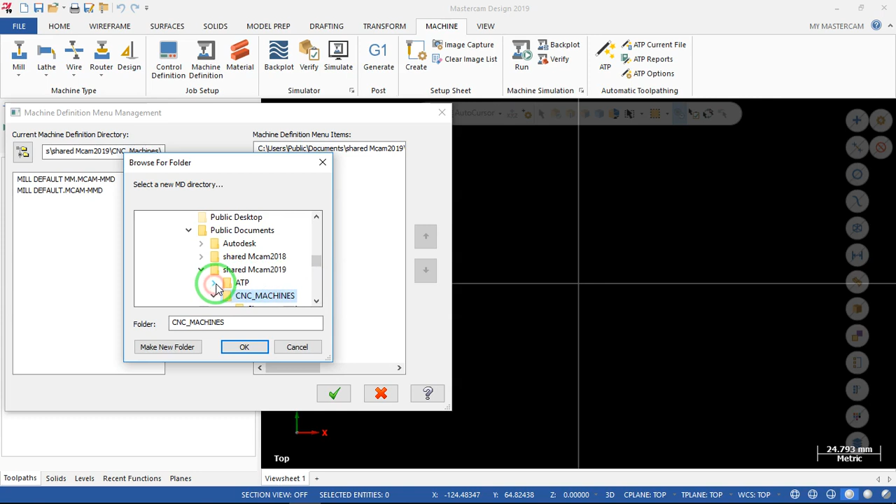When you are done, retake. For my case, I don't have to do this. Anyway, I have the machine with me - this is the Mazak machine, vertical milling machine.

So now the next thing is I want to merge the file. File, Merge, and I will navigate to my folder and all files. You can download this file from Blackboard. This is an STP file, so open it.

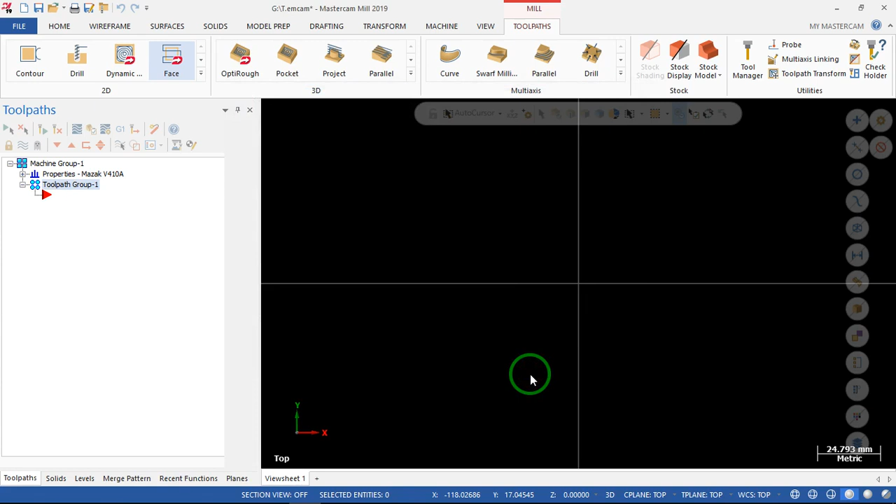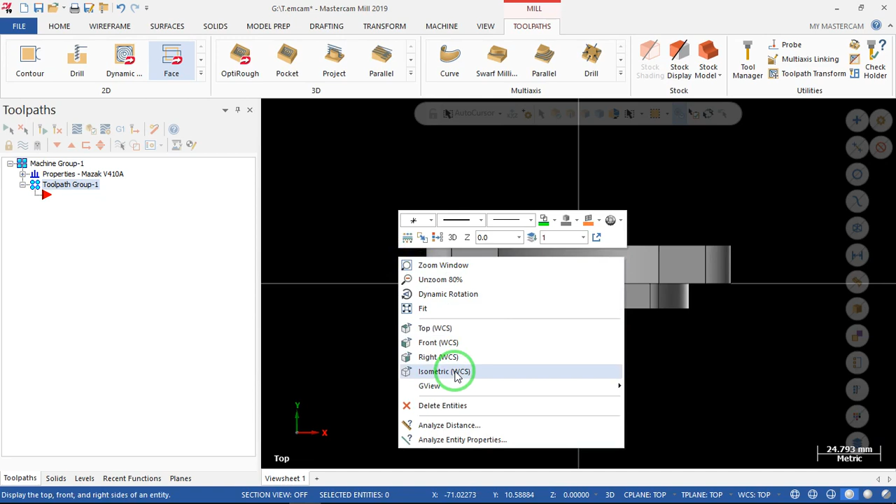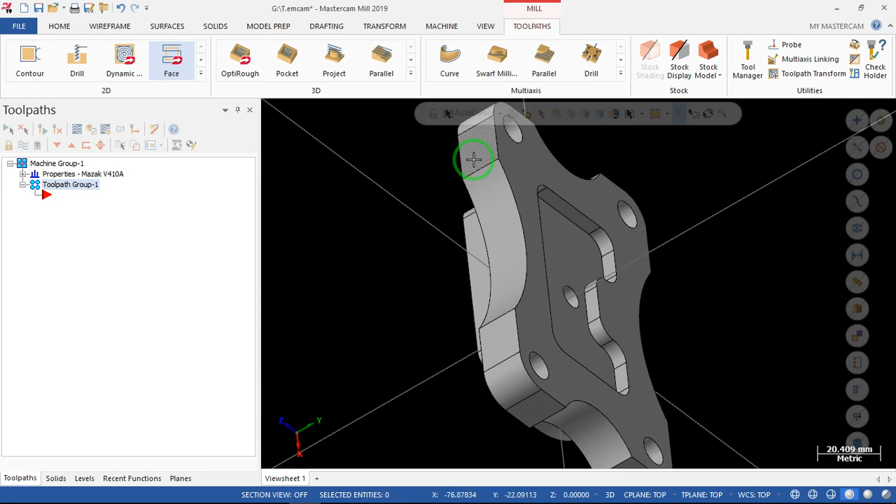Okay, so this is the workpiece. The question first asks: what is the proper orientation for this part to be machined? If you look at it from this isometric view, this side is like this, then the other side is like this. The point here is that you see this big curve. Although these are flat surfaces, at the center this is the curvature part, making it difficult for us to clamp on this surface here.

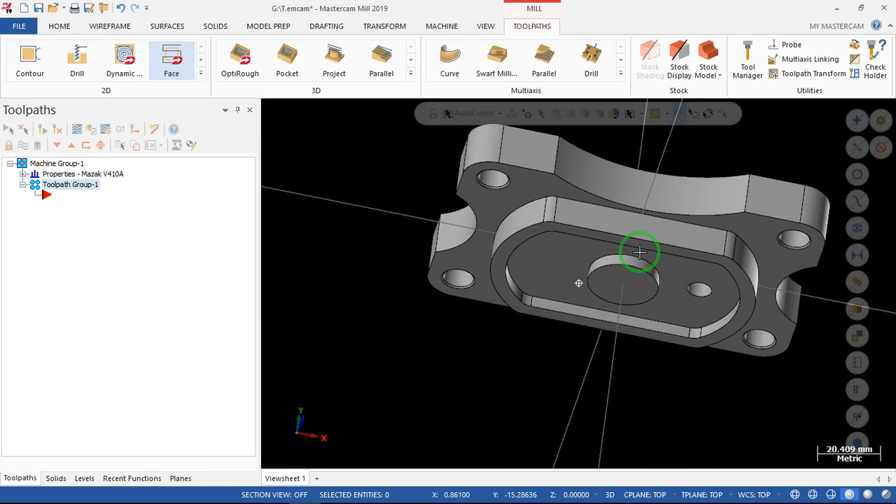So possibly a better choice is to machine from this end - at least we got some flat surfaces. These two flat walls can be mounted on the vise, on the fixed jaw and the sliding jaw. This will be a better approach compared to the other orientation. So in this case, we will have to rearrange the workpiece so that it is at the correct orientation. Now back to the top, this is what we originally worked out.

In order to get to this shape, I would like to go to my right view - my right is like that. Now I want to rotate the workpiece. Remember, rotation is always perpendicular to the screen. So this is the workpiece, I want to rotate it so that this is facing up.

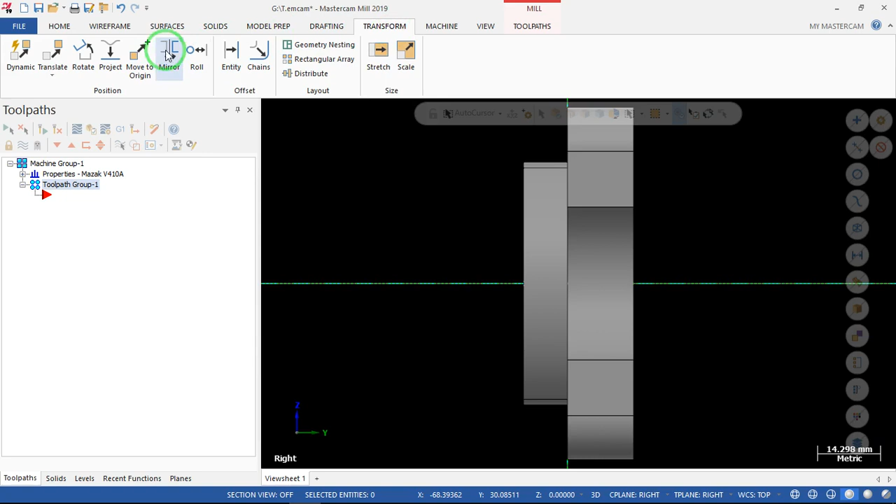We are going to machine this end. So I go to Transform, Rotate, select the workpiece and selection. Remember, we always want to move, not copy. And I want to rotate it 90 degrees. So when you enter, you see that now this case is not right - it should be minus 90 degrees.

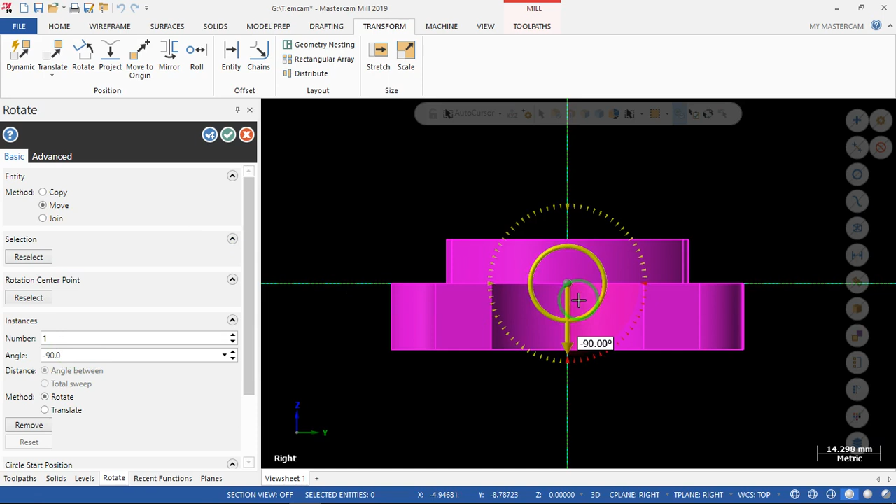Okay, this is correct. What happened is now I'm having this facing up. So I want to machine this part here first. So retake - even in this case, you can go to Front view. So this is the front view.

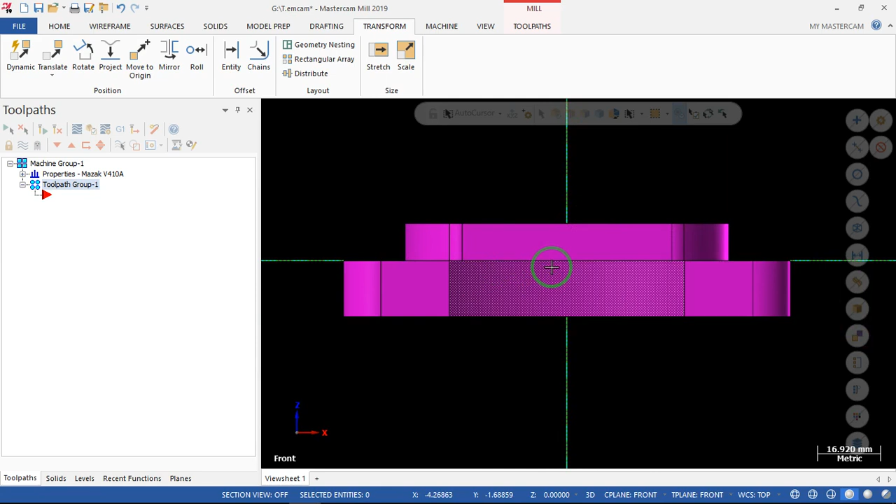Our G54 should be on top, not along this line. So I still need to translate the workpiece. Again, I will bring this - copy workpiece down by minus 10 mm.

You can take a look at your drawing. The drawing here shows that we will go down by 10 mm. So I call out the drawing - this is the part, 25 minus 15, so I need to bring this down by 10 mm.

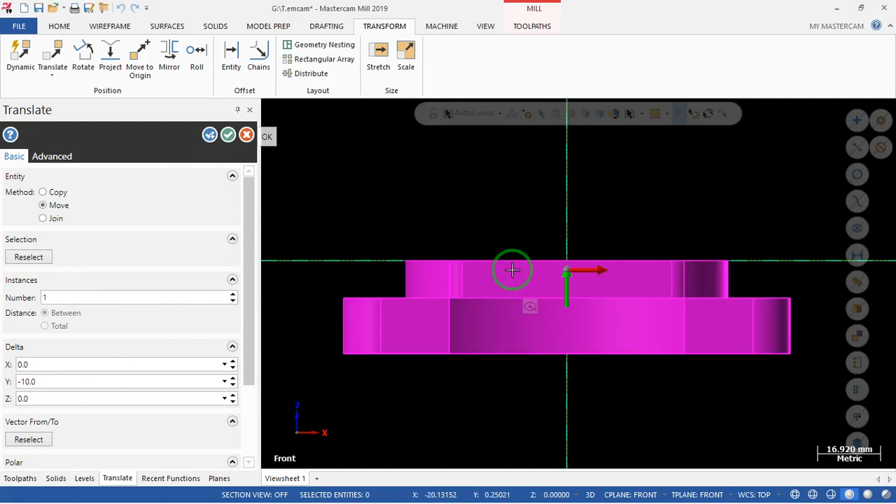Okay, let's go back to Mastercam. So I will bring it down - now my G54 is on top of the raw piece. With that in mind, now I go to the top view - this is my top, I'm going to mill this first.

After I finish milling all this, these are the flat surfaces. When I do the second side machining, this will go into the vise and support the rest of the workpiece. So isometric view is like that, front view is like that, top view is like that. Okay, let's continue.

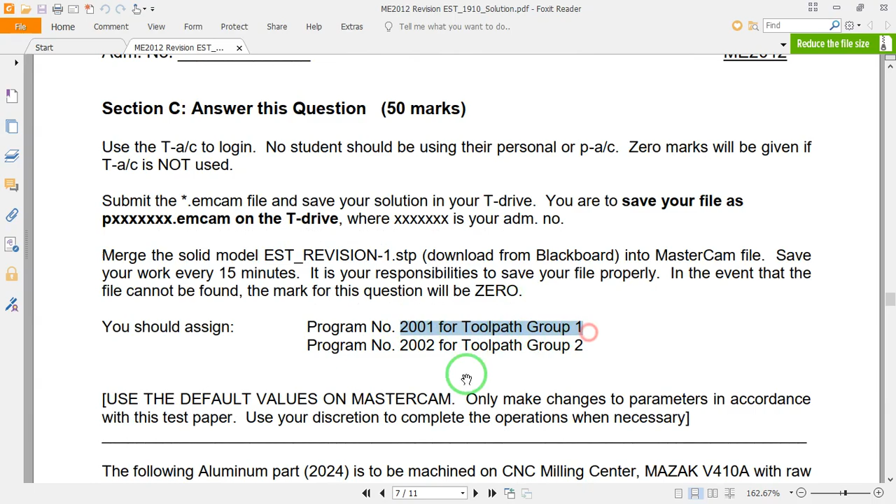Okay, go to tool settings, program number. We will have to look at the question paper. So we are asked to use this number 2001. For side 1, 2001; side 2 is 2002.

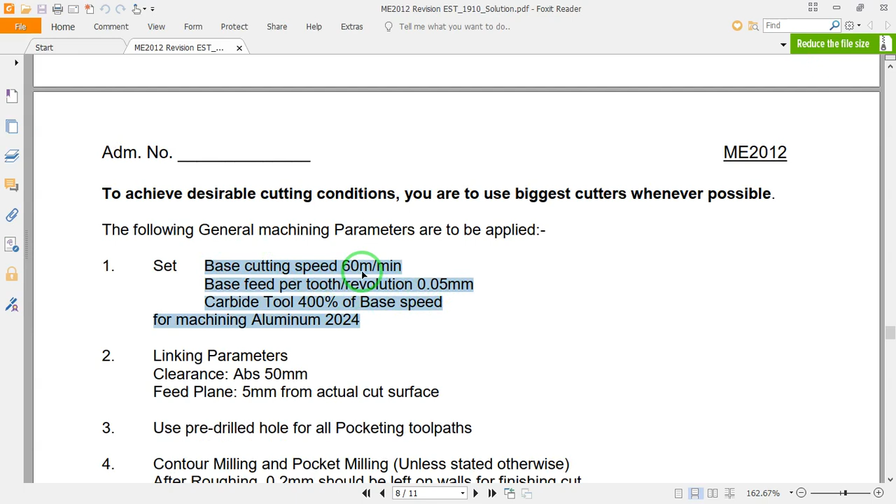Use tool's step, peck and coolant, and we have to change this value here. Edit. So what value do we want to change to? Again, we go to the question paper. It tells us these values here. So we'll enter these values: 60, 0.05, and 400% for the carbide tool.

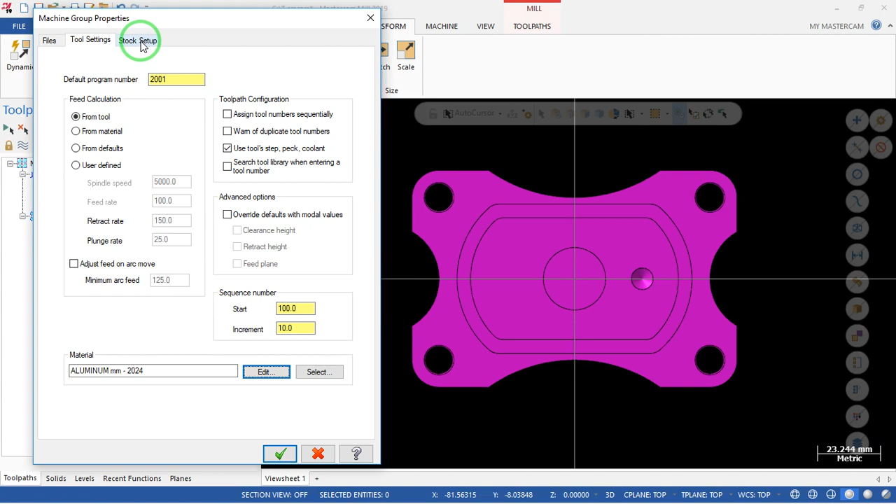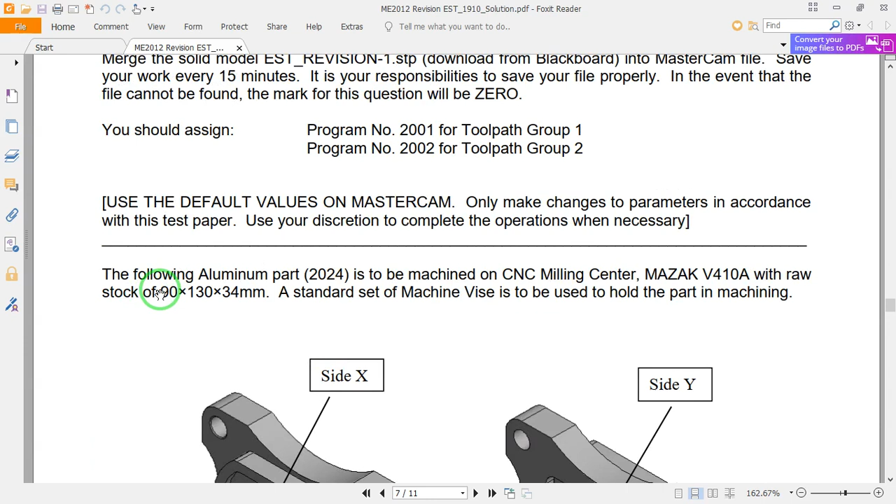With that, green tick. And so now we are done with this. Then stock setup, so we have to input the raw materials here. I will go to the paper. The raw material itself is 90 mm,

130 mm on the x-axis, 90 mm on the y-axis, 34 mm on the z-axis. So I will have 130 here, 90 here, 34 here. So these values are the raw material size, the size of the raw material.

And also, if you look at this, it tells you that the first operation is a facing operation. The facing amount is 0.5. So in order to machine it up to G54, I will have to bring this up by 0.5. So this raw material will be above the work piece by 0.5 mm. Then when we want to machine, I will just remove this 0.5 mm to get to G54. Okay, so with that, we are done. Green tick.

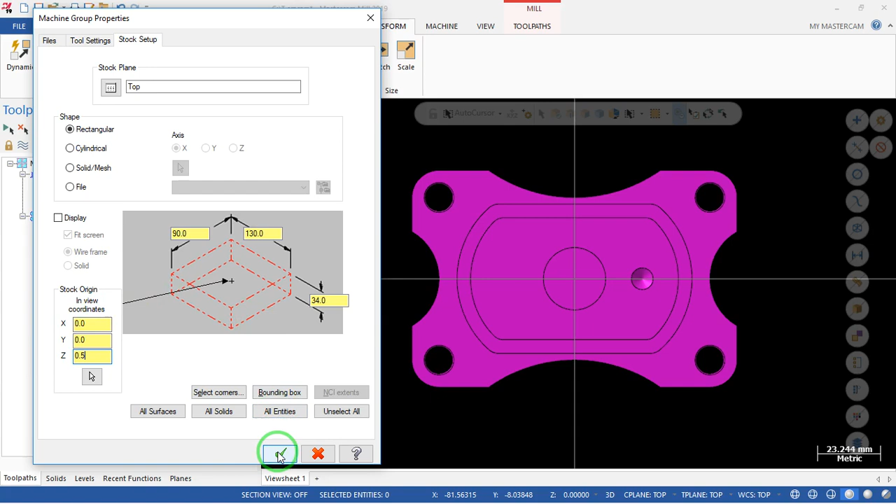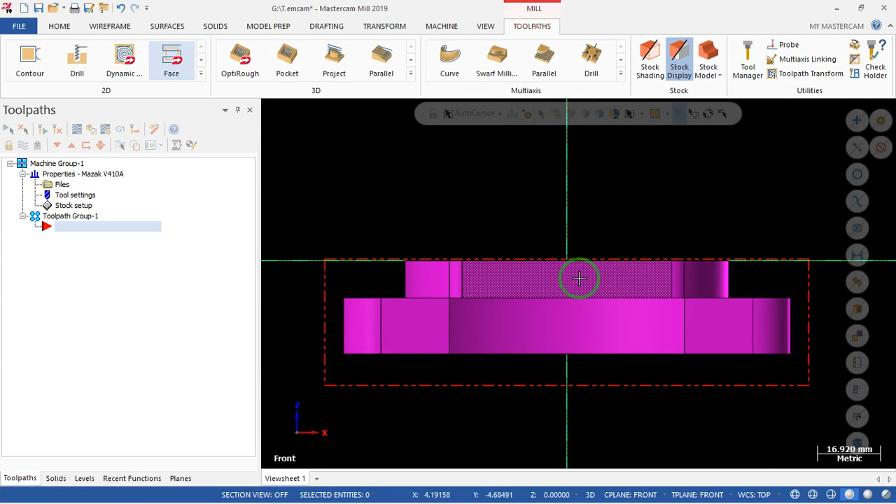Okay, we go to toolpath and click on this icon to display the raw material. So now you see that this is raw material. The raw piece is nicely located inside. And if you look from the front, again, this is the 0.5 mm that we have to remove in the facing operation.

So, okay, back to isometric. And now, first operation, facing. So this, we don't have to do anything, just green tick will do. And tool, so we have to define our tool. Right click, create tool. First is the face mill. This is the first operation, face mill.

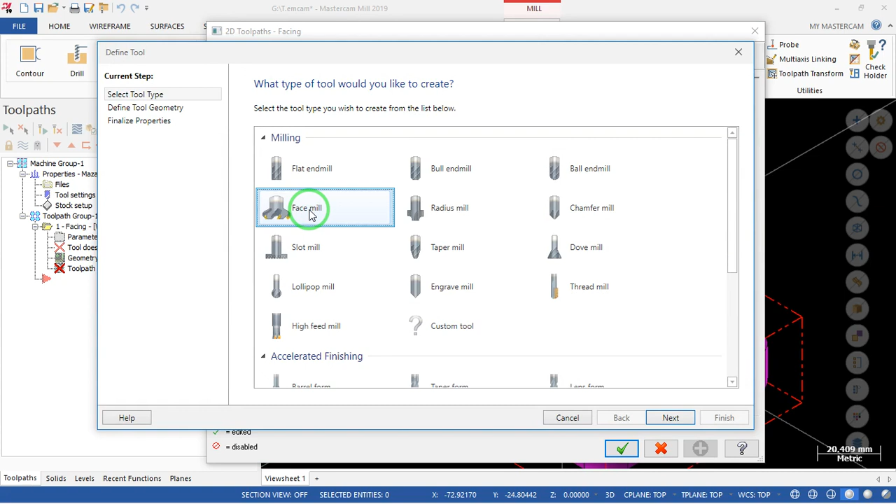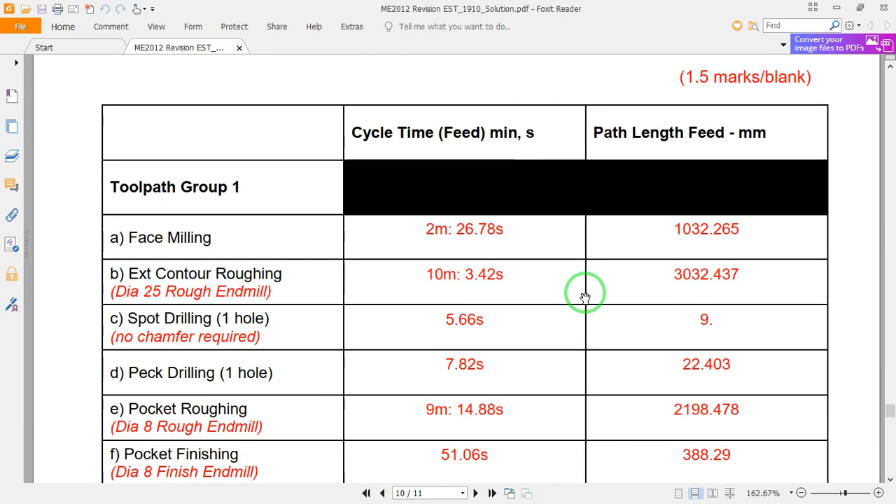So we can check the paper. The face mill is here, 63 mm diameter, 7 flutes with a taper angle of 0 degrees. So we come to here, 63 mm diameter, but the angle is 0 degree. So with that, the image comes out.

Next, tool number 1, that is correct, but number of flutes we have here is 7 flutes, and material is carbide, correct. So we will then calculate the spindle speed and the feed rate, and of course, don't forget to turn coolant on for all tools. So with that, our first definition is complete.

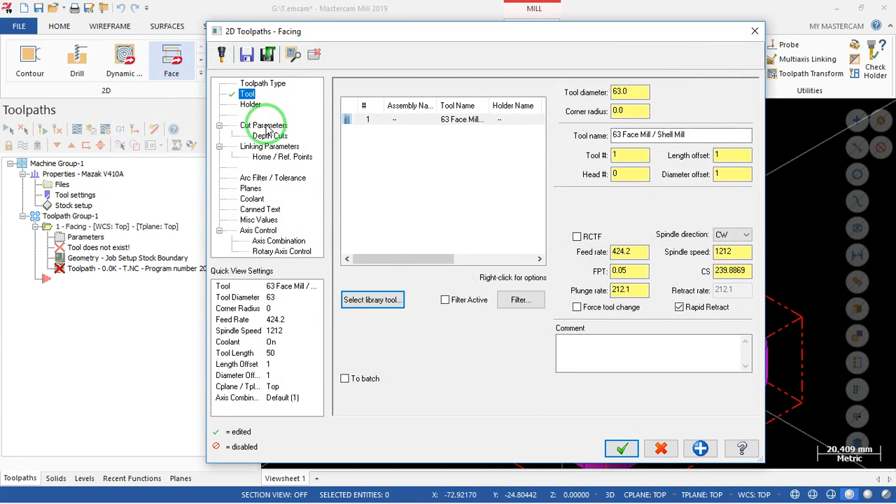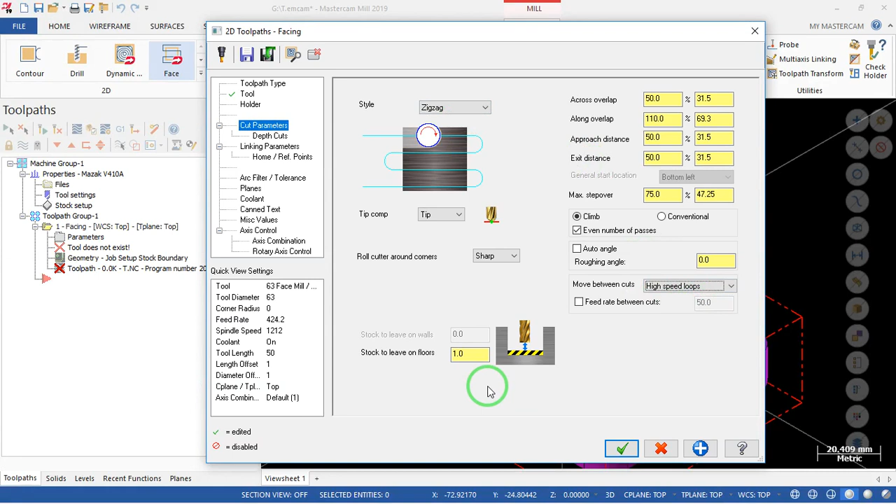Finish, followed by cut parameter. Again, if you look at the paper, it says that the first operation is facing, zigzag, high-speed loop between passes. So zigzag, high-speed loop, and we are not going to have any other facing operations, so we will cut to 0.

Depth of cut, we can uncheck because it is only 0.5 mm. One cut we can finish all. Linking parameter, 50 on top, uncheck retract. Feed plane is 5 mm above. Top of the stock is 0.5. We will cut to 0. G54, absolute, so we are removing that 0.5 mm. So with that, green tick. So this is the facing operation.

So we will now go to the second operation. The second is a rough milling of the external contour. So we will have to cut this external contour. So we'll say contour, and we'll use loop, and we'll now select one of these edges. So this is correct. Green tick, and green tick once more.

The tool that we want to use, right click, create tool. So we will now see the paper. What is it? We are doing the roughing now. Okay, we are doing roughing. So we want to use a bigger tool.

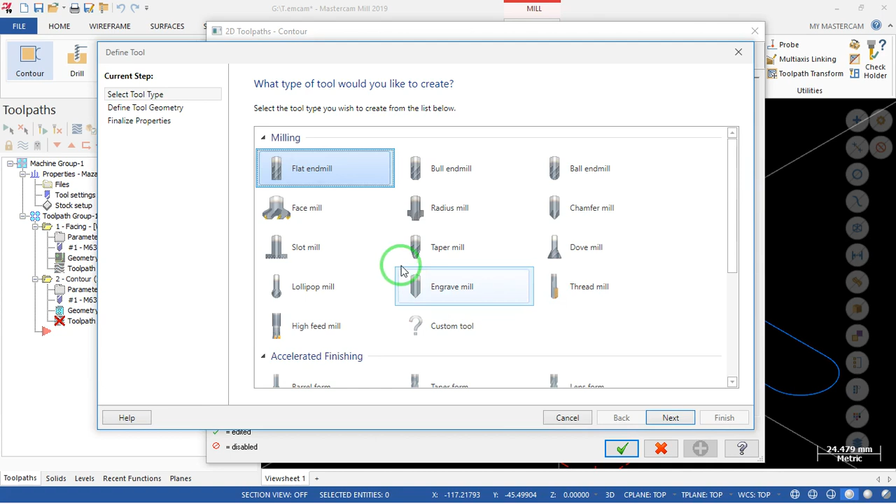So possibly this is roughing. So we want to use a 25 mm mill. The bigger it is, the more material you can remove in a rather short time, more efficiently. Okay, so here we say mill. Next, 25 mm mill. So with that, next again. This is tool number 2, correct?

Number of flutes, however, is 2. And material is carbide, that's correct. So calculate the speed and feed. Again, coolant on. So with that, finish. So this is tool number 2 that we are using.

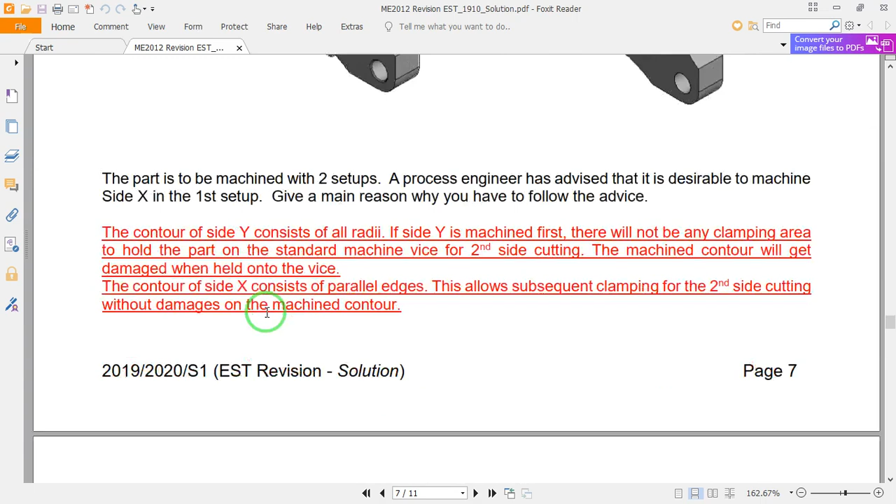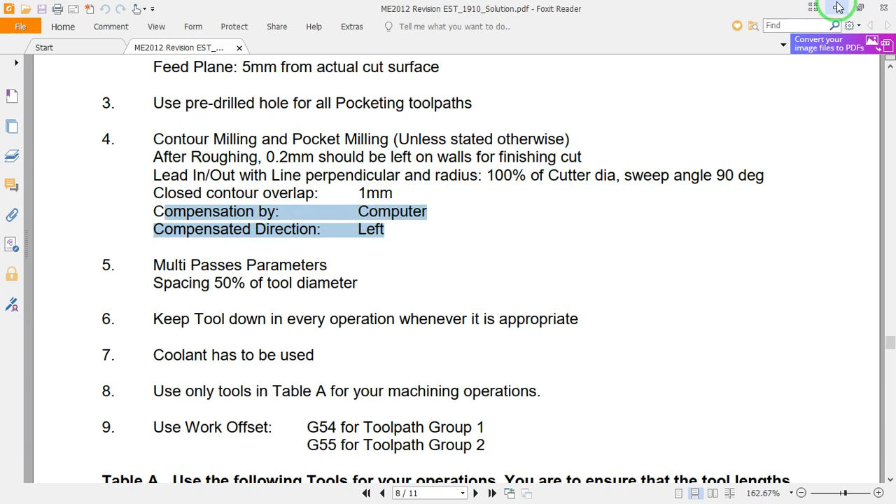Cut parameters. The paper tells us, okay, we are using computer for compensation. Where? Here, compensation by computer. Okay, compensation on the left. And for every closed loop, we'll be using 1 mm. So this will apply for all contour milling and pocket milling processes. So we see that computer, correct? But we want to have 0.2 mm for the finishing operation.

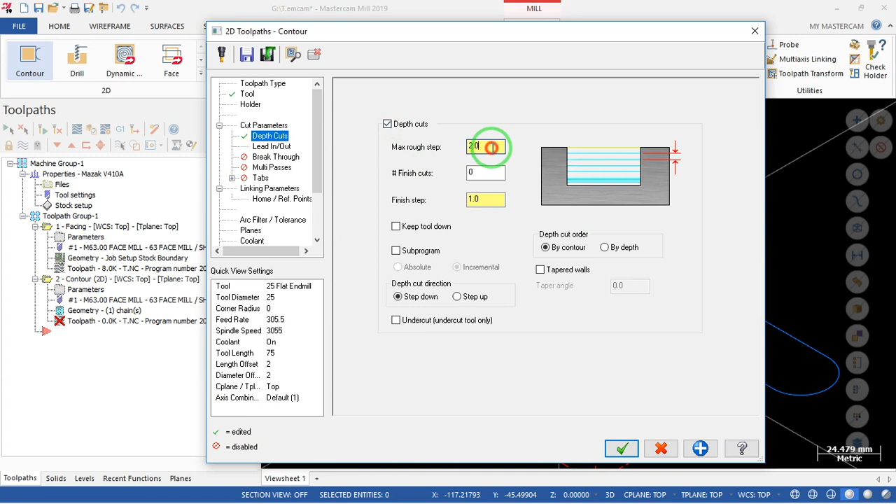Then depth of cut. Again, here you see that rough cut is 15% of the tool diameter. So with that, we say activate. Then we'll input a formula. This one is 15%, 0.15 - I type a 0 as well to make it clearer. 0.15 times 25 mm diameter. So this is the depth as indicated in the question paper. So enter. So 3.75 is the value, and I want to keep 2 decimal places.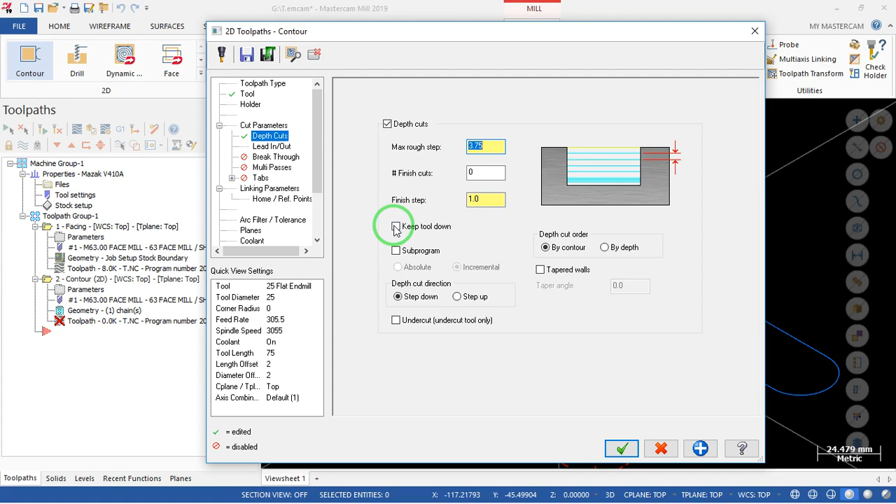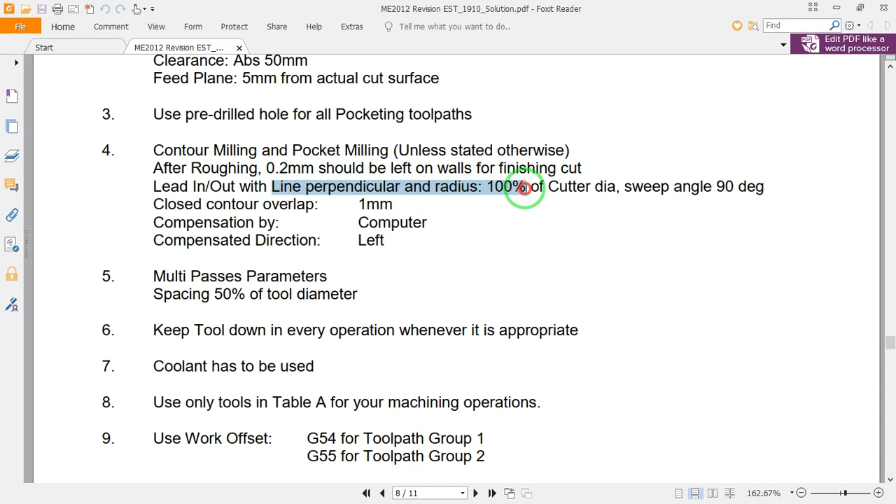Followed by lead in, lead out. Again, the paper also could tell us the operations we'll be using: line perpendicular, radius 100%, sweep angle 90 degrees for all closed loop. Since we are now doing the closed loop, line is perpendicular, 100%, copy from left to right, and also we would like to have overlap. This is a closed loop operation, so we are applying all this.

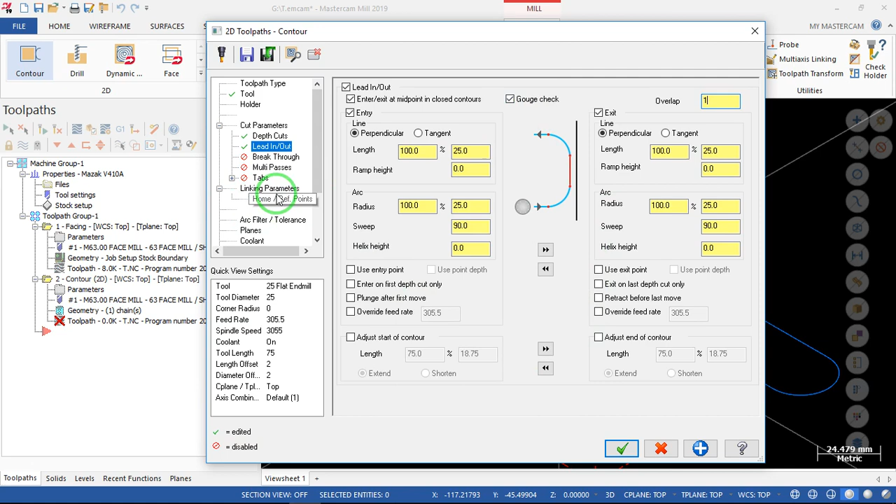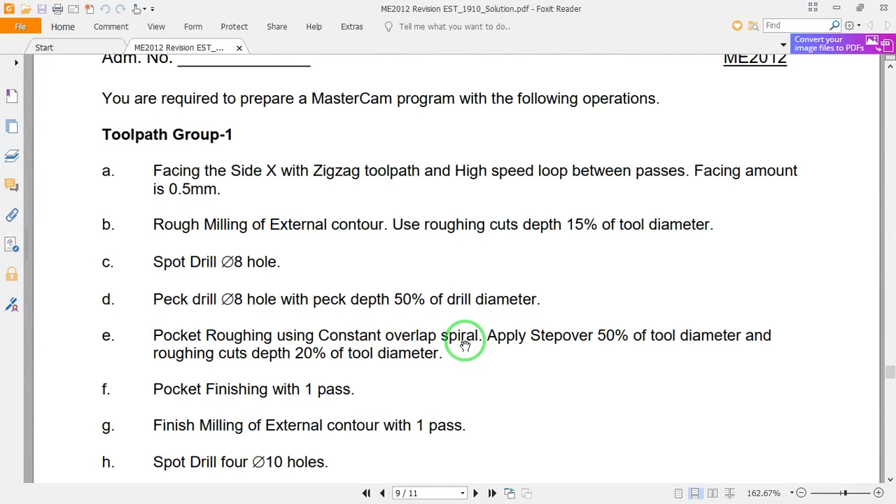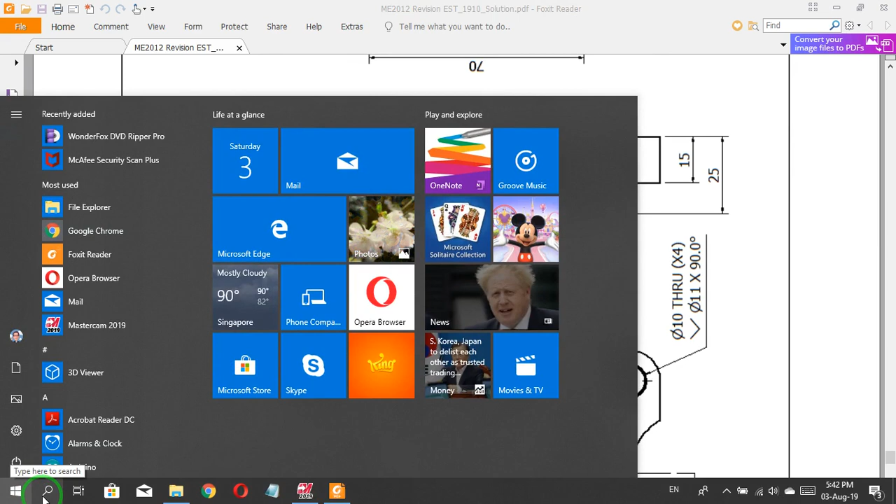Continue with this clearance, uncheck retract. feed plane is 5, so we have to find out absolute is 0. Go down by how much? Again we look at the drawing, we go down by this amount. This is 10 mm, so go down by minus 10.

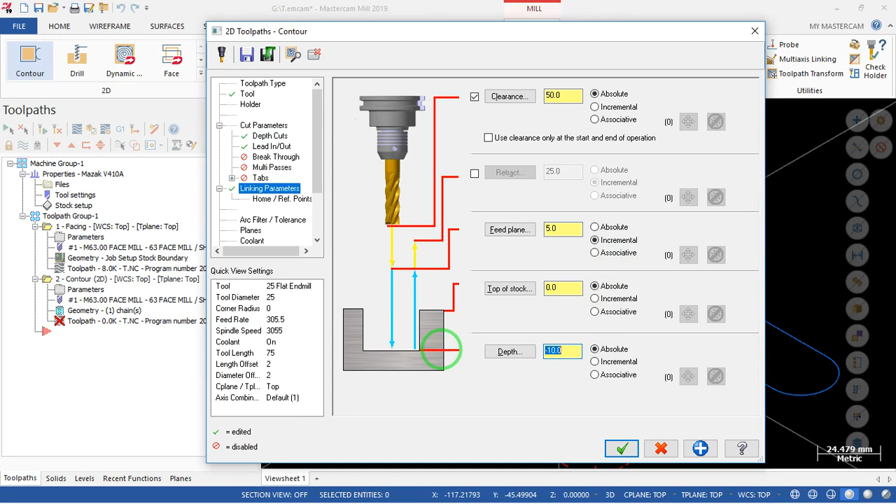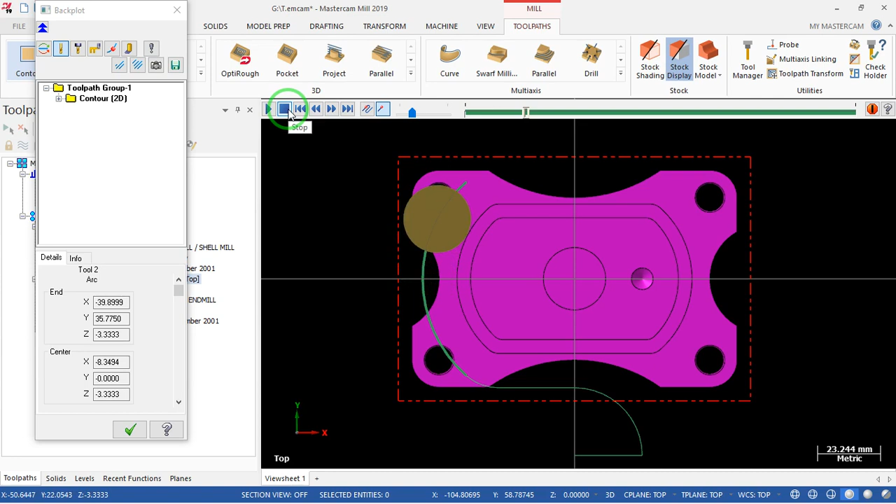Okay, so when we say green tick, we look at the top view now and we can do a simulation. So what happened is like this - actually just now the calculation I was trying to show is this. When we are doing like this, actually some of this material is not being cut. You see that the material over here is not cut, this corner as well. So we come to here - you see some of this material is not cut.

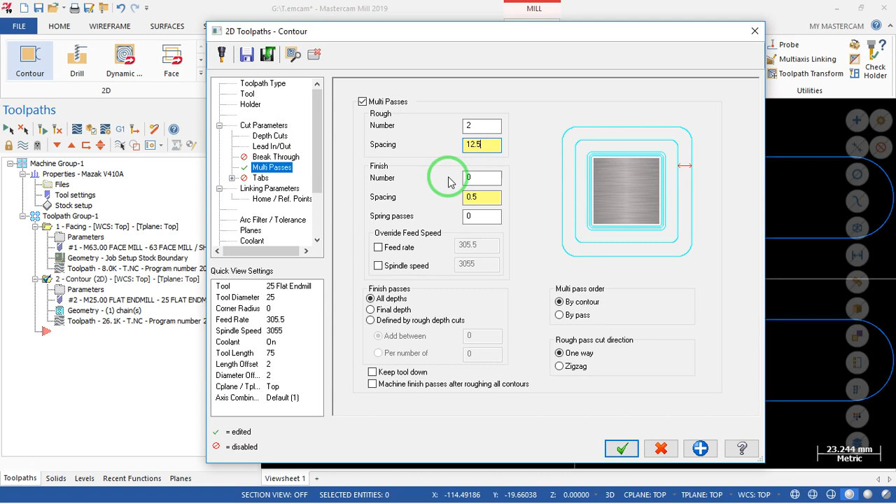So we say that in this case we need to modify this, I have to engage multi-pass. So I want to go 2 passes, and the question states that for the multi-passes, the spacing is half of the diameter of the cutter. Now that diameter is 25 mm, so I have 12.5. So 2 passes will do. Green tick and regenerate, we are now able to...

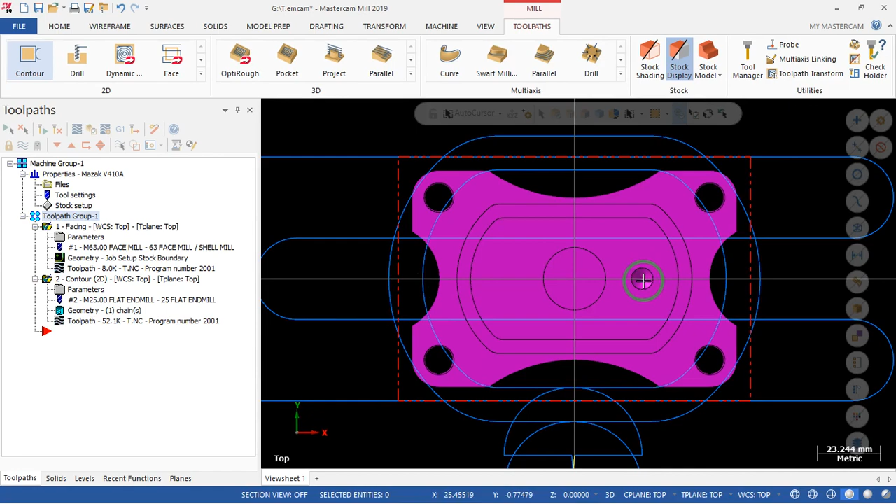Okay, continuing. You see the next operation on the paper, which is a spot drill of the 8 mm hole, this hole. Go back to isometric to see the hole nicely. This is the hole that we need to drill. So we go to drill and select the center, and green tick.

So tool - we have to look for a tool, create a new tool. So with this we are using a spot drill. What is the size of the spot drill? We look at the drawing here. The hole that we are drilling is this one, which is diameter 8.

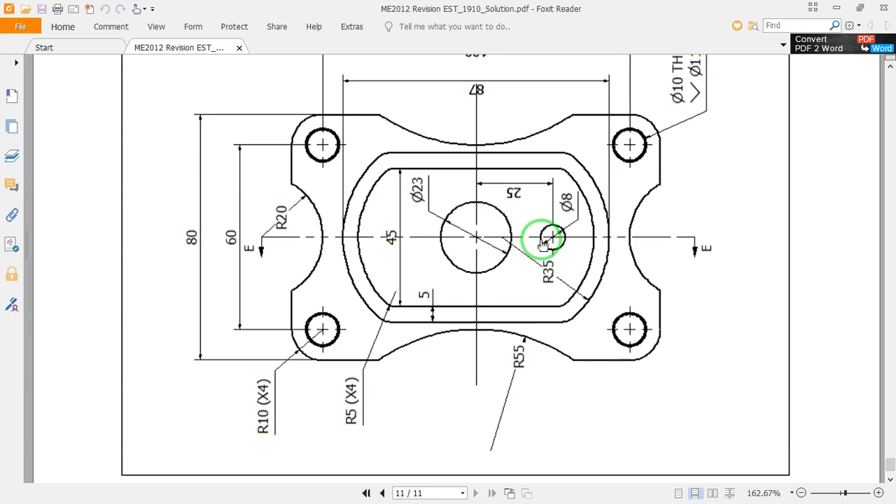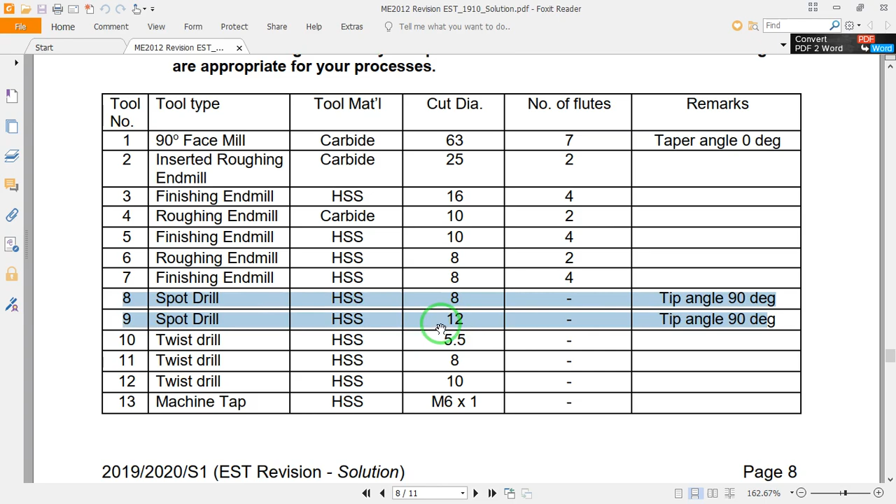The spot drill should be bigger than this. Although we are not going to produce any chamfer, the spot drill should be more than this. So now if you look at the table, spot drill over here - there are two of these, one is 8 mm, one is 12 mm. As the spot drill needs to be bigger than the 8 mm, I can only choose the 12 mm one. So back to here, now I need to use spot drill 12, and I need to use this tool.

Next, this is tool number 9, and material is high speed steel. Calculate the speed and the feed, and this is okay, no need to change. So again we have to have coolant on, then finish. Okay, so we'll be using this tool.

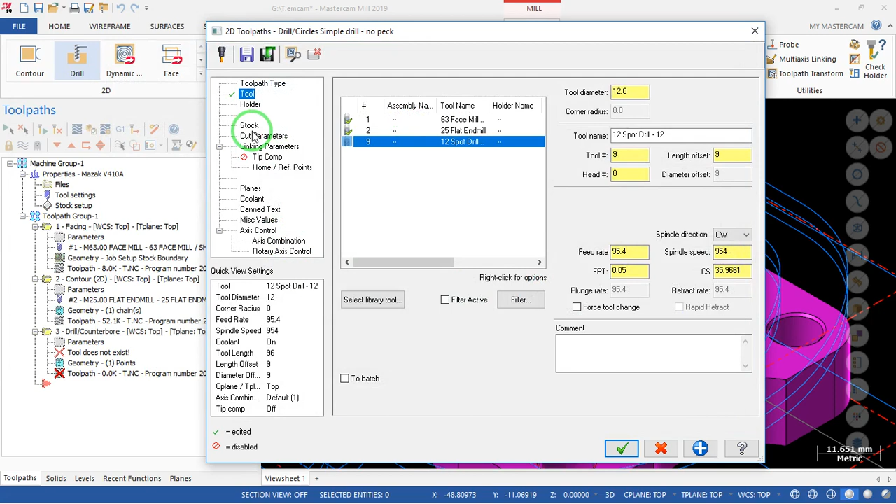Cut parameter, nothing to change. Linking parameter, check and check. This 5 mm, and top of the stock is 0. How deep are we going down into? Because the hole itself is 8 mm hole, and we don't want to have any chamfer, so the depth I want to go down is -4 mm only. Okay, so with that, green tick.

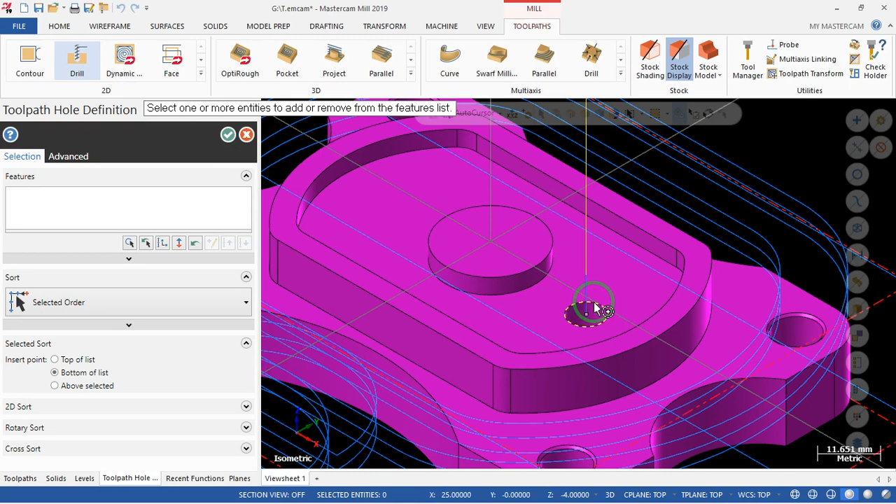So there we are, we have spot drill. Next operation is the peck drill. So peck drill - drill, again I want this hole. Green tick. Tool, so create new tool. I need a twist drill, and the diameter is 8, we need to drill an 8 mm hole.

Next, tool number for this twist drill is 11, and material is also high speed steel. So with this we calculate and coolant on. Then I will come to here, I will change this to peck drill. With the peck, first peck is 50%. So with that we say finish. Cut parameter is peck is 4 mm, linking parameter...

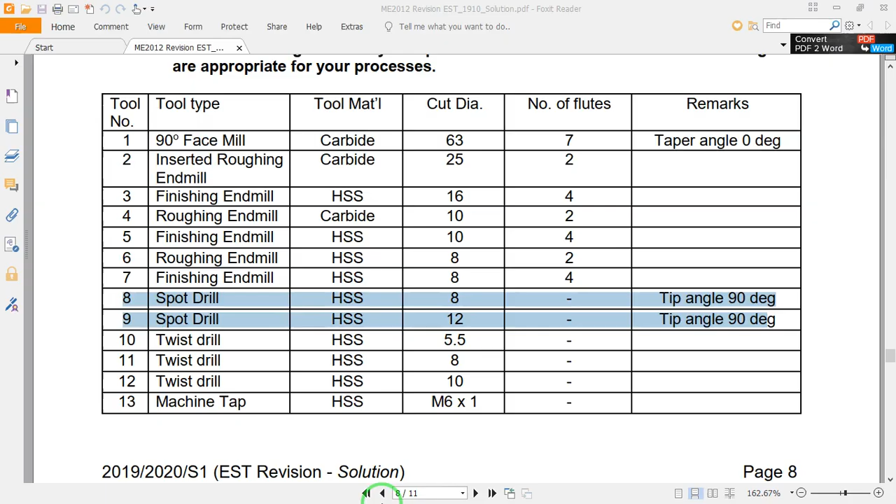This is 0. How deep are we going down into? Okay, so if you look at the work piece, if you look at the drawing, it is below here. Okay, this is the hole that we are drilling. 4 plus 7, 4 mm here, 7 mm here, so altogether is 11 mm. So we are going down by -11.

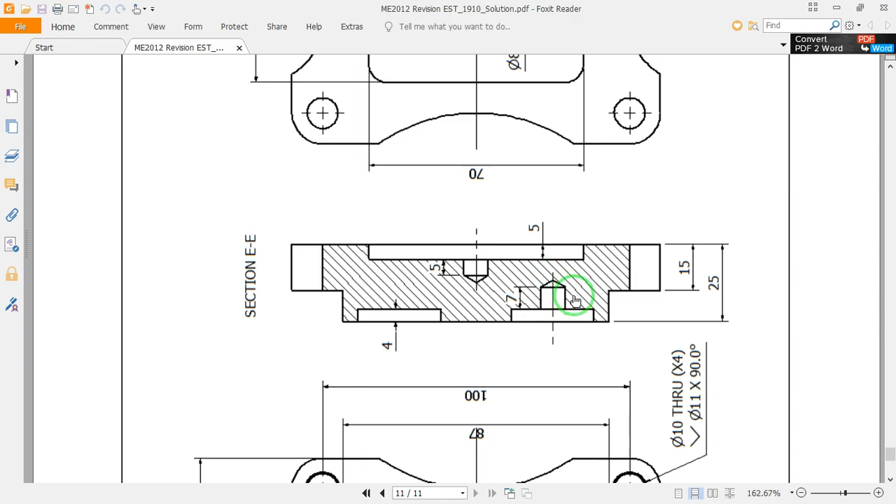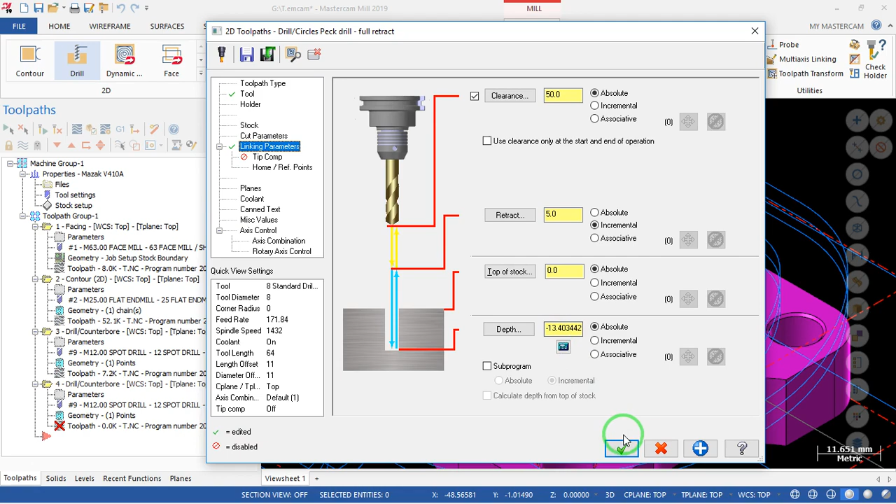However, we never calculate this conical part, so we have to calculate the conical part by making use of this formula. This is a calculator icon here. Click on it. 8 mm initially, final is also 8 mm. So now the computer calculated that for the conical part we have to drill an extra -2.4 mm. So add this to the value here. So green tick. So this is the total depth that we have to cut into. So with that, green tick. So this is the hole.

Okay, after we finish the hole, we finished the hole already. Now we want to do this pocket, this area here. Before that, we will have to use wireframe, create a point. So select this circle. So that creates a point. When we do pocketing, we need to use the drill hole. So we have to tell Mastercam that the tool has to go down around this hole. So we'll now go to toolpath followed by pocket. And first of all, we will say point, and we will select this point.

Okay, should be okay. Select the point. Okay, let's start again. I forgot. All right, let's go pocket. We'll select the point. Select this point. After that, the solid. Now loop. I want to go for this loop. But at the same time, because we want to avoid this island, we have to select the island as well. Then okay, so with all this, this area, excluding this area, is the area that we want to cut.

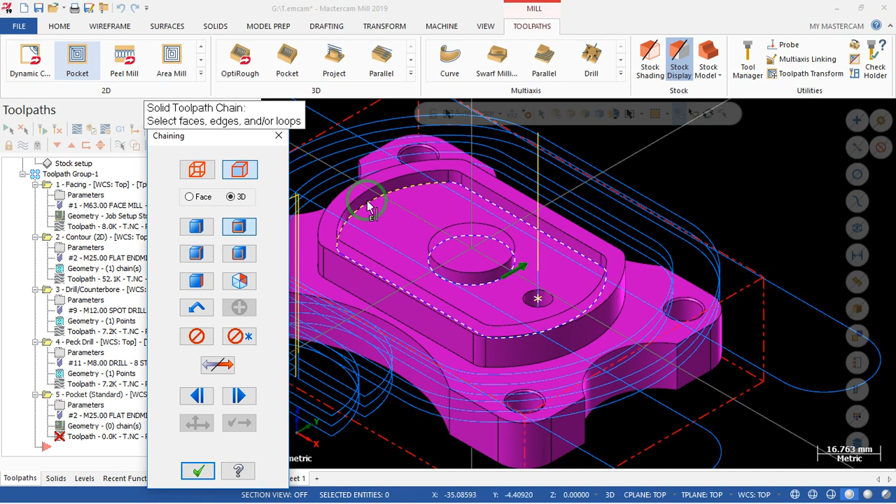So okay, green tick. The next thing is we have to look into the tool that we need to use. So now we have to go into the drawing. This width is 45. The diameter of this is 23. So let's go to the calculator. 45 minus 23. So our value is 22. So 22 meaning that 11 mm here, 11 mm over here. So we have to look for a tool that is just nice, good enough to go through this gap.

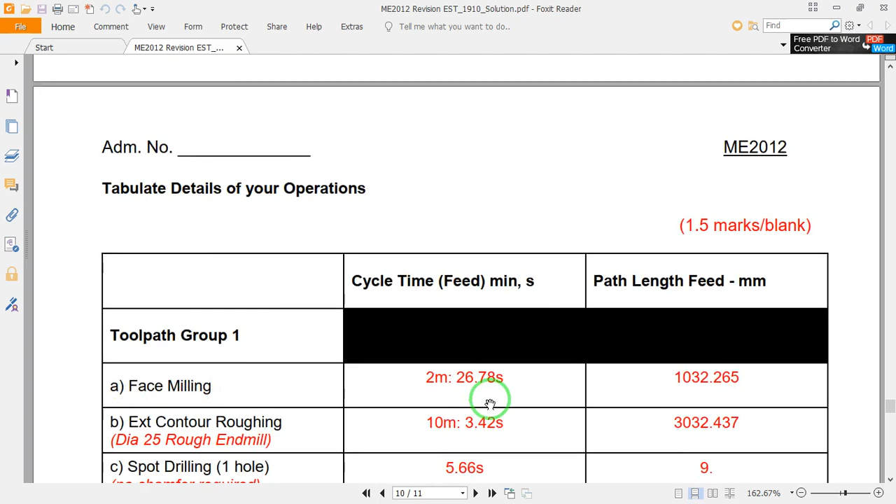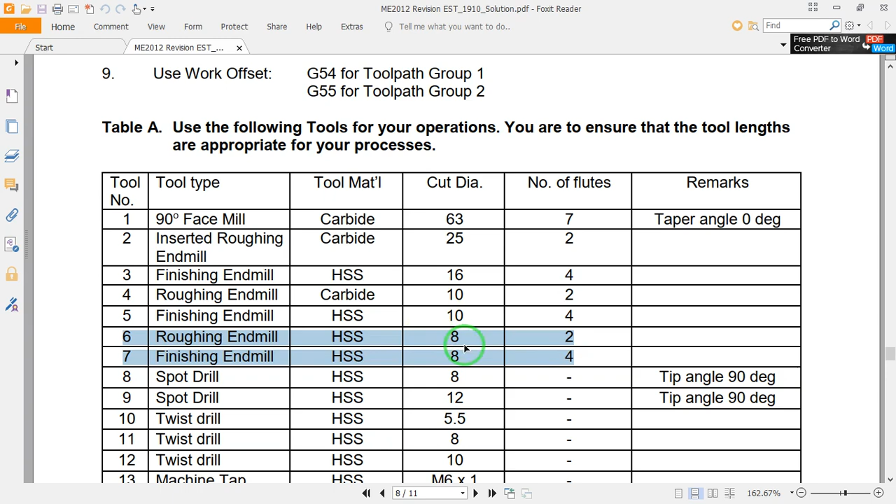So we'll take a look at the paper. So which tool? So okay, we are looking at possibly tool number 6 and 7 for roughing and finishing. 8 mm. There's an 11 mm gap. However, we also want to give some allowance, so we are using an 8 mm tool. So with this, we'll right click, create new tool, and flat end mill. So we say 8 mm, and this 8 mm tool is tool number 6. So we type in 6, and it is 2 flutes. Material is high speed steel.

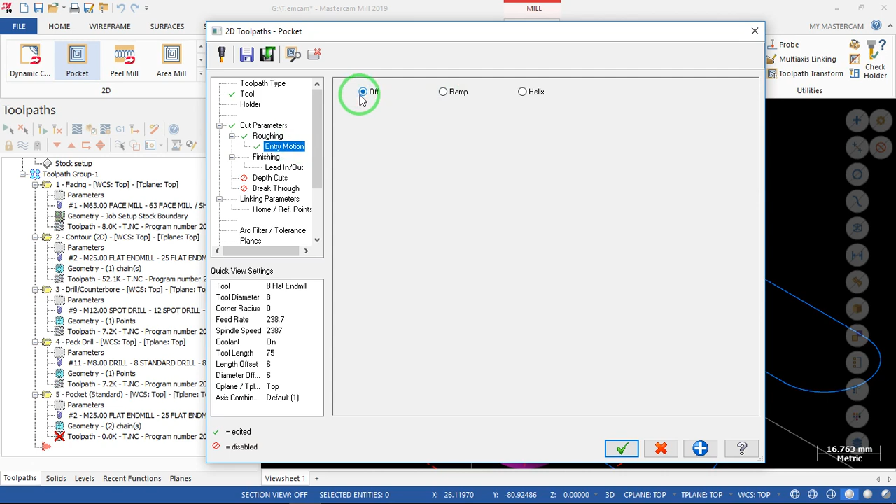So we calculate, and okay, so this is an end mill. Okay, and calculate. Okay, we'll do finish. Okay, so tool number 6, we are using this tool. Cut parameters. For this pocket we want to leave 0.2 mm behind on the wall, but nothing on the floor. We will do finishing. Roughing is constant overlap spiral, 50% overlap. Entry motion we are using off because we want to drill hole. Finishing, nothing required at the moment.

Then depth of cut. If you look at the paper, it says that the depth of cut is 20% of the tool diameter. So 20%, 0.2 times the cutter diameter, which is 8. So we have 1.6. Keep tool down, and linking parameter 50 on top, uncheck retract. Feed plane is 5, and top of the stock is 0. I go down to -4. The pocket is 4 mm. Okay, so this is the pocketing.

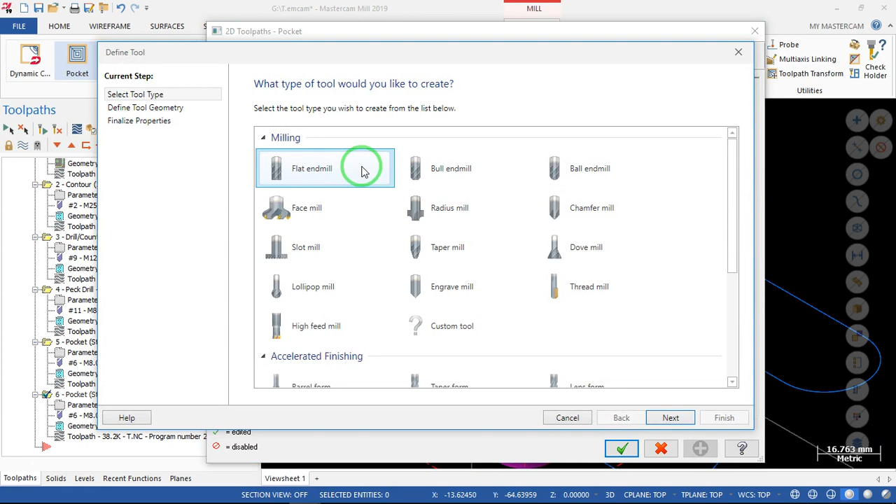Okay, so we'll now continue with the finishing pocket. So this is the rough pocket. Right click, copy and paste. Of course, we have to change the parameters. Now again, first of all, tool. Number 6 is a roughing tool, so I have to create a new tool, number 7, which is a finishing tool. It is still 8 mm in diameter, but tool number 7, 4 flutes, high speed steel, calculate, and okay, that will do. So done.

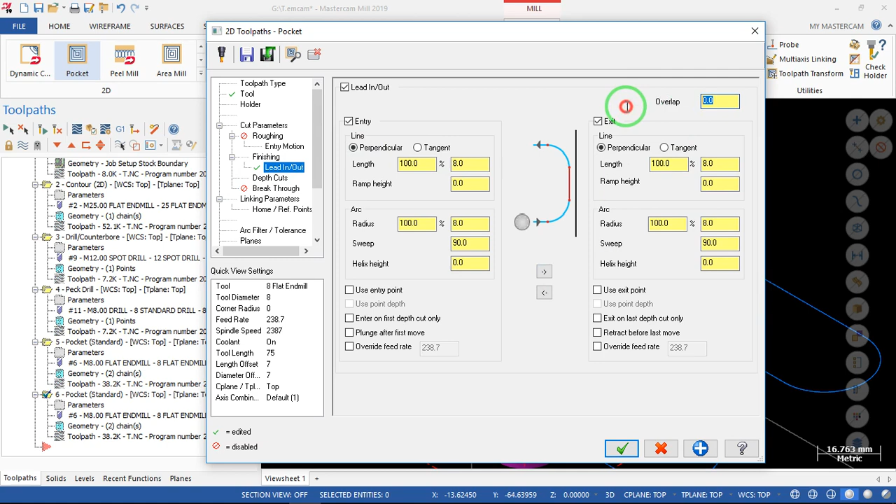So cut parameters. Now we are not leaving anything behind because this is a finishing operation. We are not doing any roughing. Finishing now. For finishing, I will take in the default values, and then I will do all this in one pass. So lead in and out. We are using perpendicular and 8 mm. Then depth of cut, one pass will finish all. Pocket finishing, one pass. So linking parameters the same.

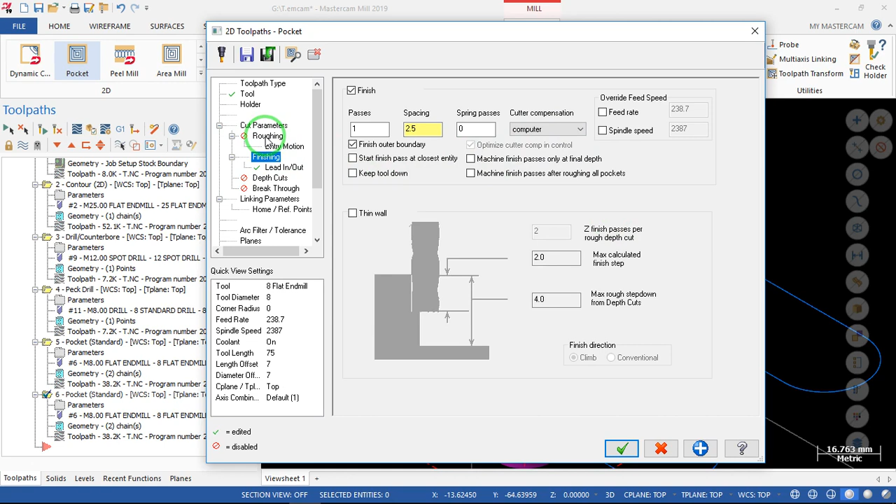So let me check again. Lead in and out. Finishing. We are using computer because the question says that we are using computer all the time. So roughing uncheck. Cut parameter 0. Okay, so this is our final thing. So green tick and regenerate.

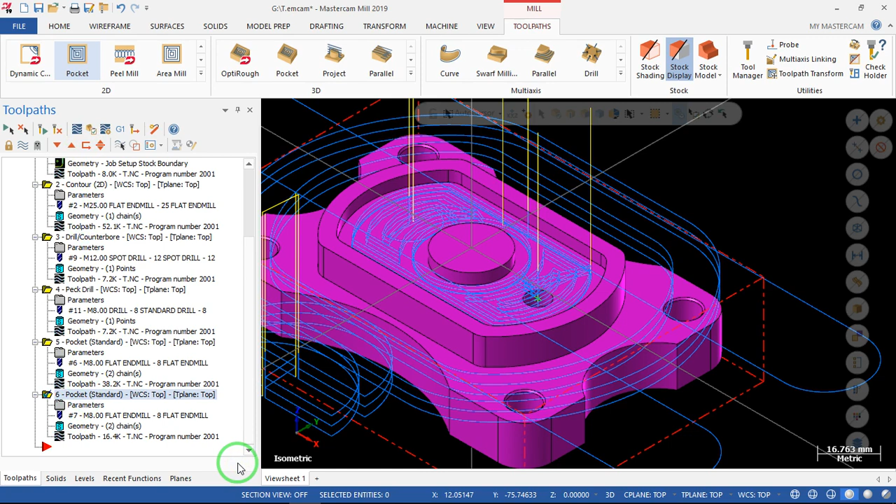No, did I change this? Did I do regenerate? Reinitialize? Yeah, I didn't. Okay, so again, now I have to regenerate again. Okay, let's continue with the next operation, which is the finish milling of the contour.

So this is the contour second operation. I copy and paste below. So now I will modify the parameters. First of all, the tool. Earlier on we were using tool number 2. That was a roughing tool. So we want to use a finishing tool.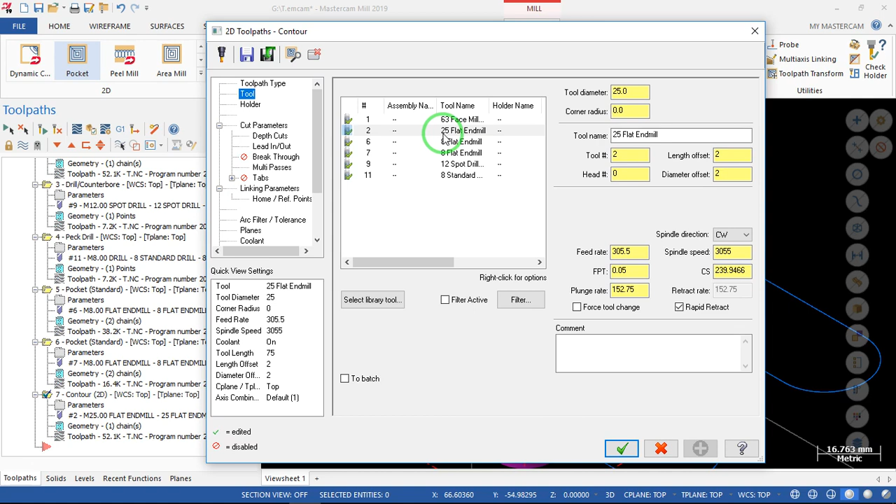Well, we want a bigger diameter one. So we are thinking of using tool number 3, which is a finishing tool, but 16 mm in diameter. And tool number 3, yes, correct. It is high speed steel. And number of flutes is 4. So calculate.

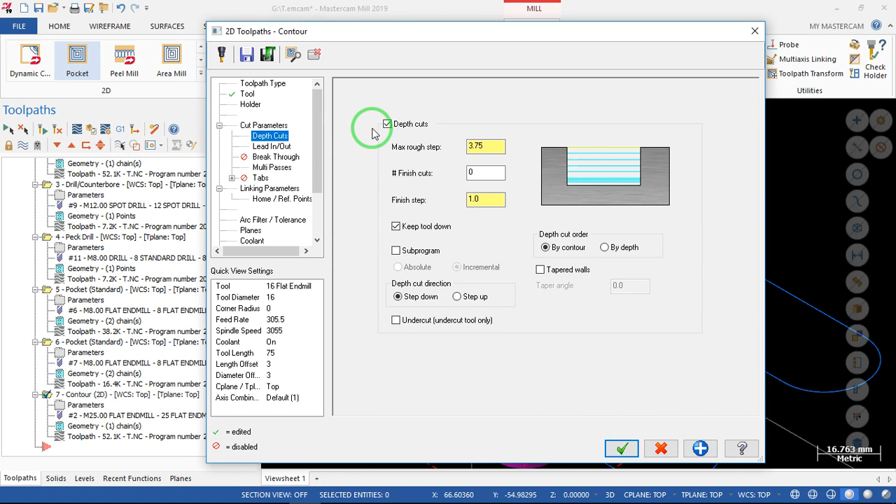Okay, so finish. Now I have to initialize the speed and feed. Cut parameter, we are still using contour, but this is finishing, so no material to be left behind. One cut will finish all, so we will not be using any depth of cut. Lead in, lead out 100% and 1 mm of overlap. We don't need multi-pass this time because we are doing finishing.

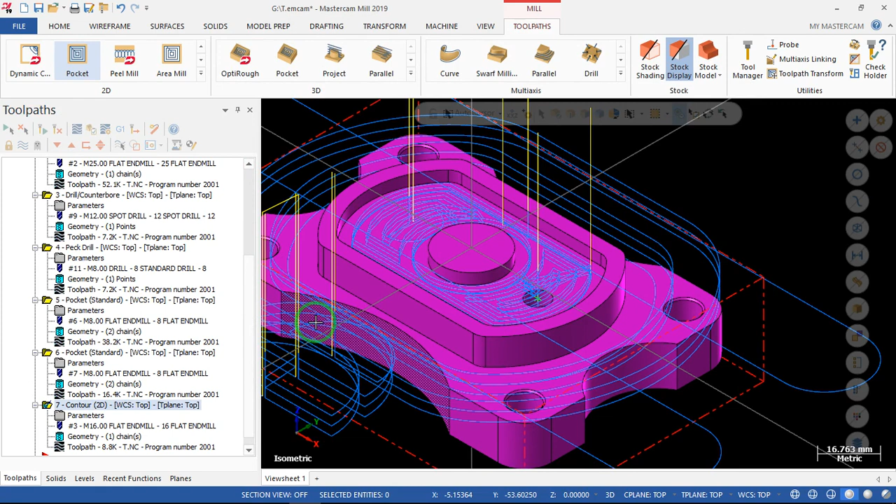50, okay, all this alright, correct. So we'll just green tick. Regenerate. Okay, so next we will try to drill the 4 holes. 1, 2, 3, 4. Now the tool paths are too messy, so I want to hide away all the tool paths, so it's easier for my next operation. Okay, so now my next operation is drill.

I want to drill these 4 holes, so I select hole number 1, number 2, number 3, number 4. So 4 holes. Now again we have to check the drawing. What do we have? Okay, these 4 holes, we have to create a countersink, which is diameter 11. So meaning that my spot drill must be bigger than diameter 11.

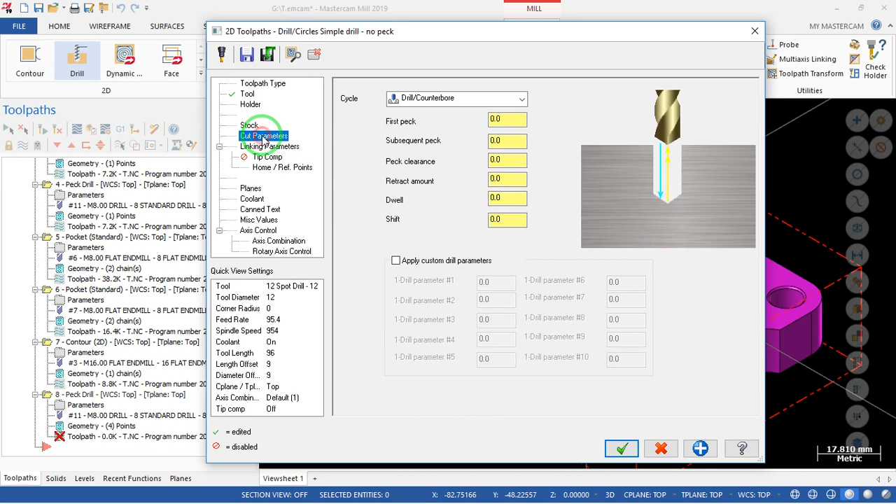So for that, I will use this one, which is a diameter 12 spot drill. So we are cutting a countersink of 11 mm, so this is good enough. Cut parameter, nothing to change. Linking parameter 55. Top of the stock is 0. How deep are we going down? Because we want to cut 11 mm, so minus 5.5. So with that, green tick.

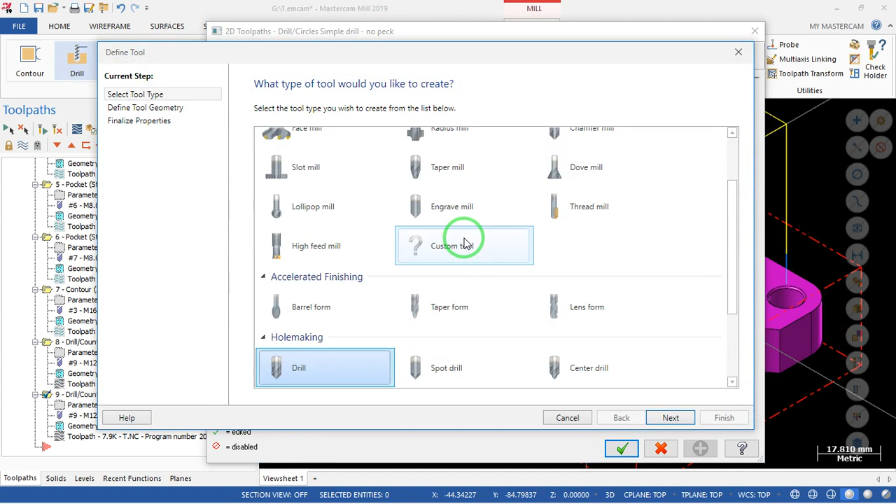Okay, the next operation is the last for the first side. We'll drill 4 holes. I will copy and paste. Right click, copy and paste below. The same 4 holes, so I don't have to reselect the holes again, but I have to change the tool. The hole itself is diameter 10, so I have to create a drill which is diameter 10.

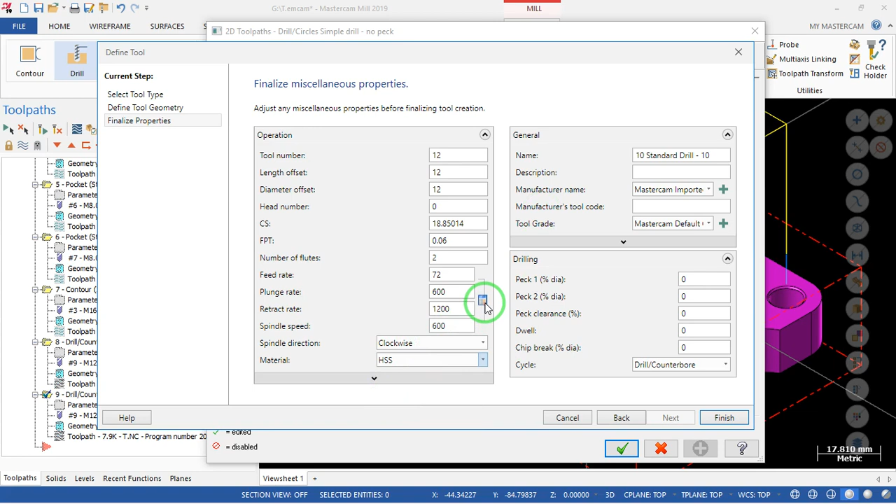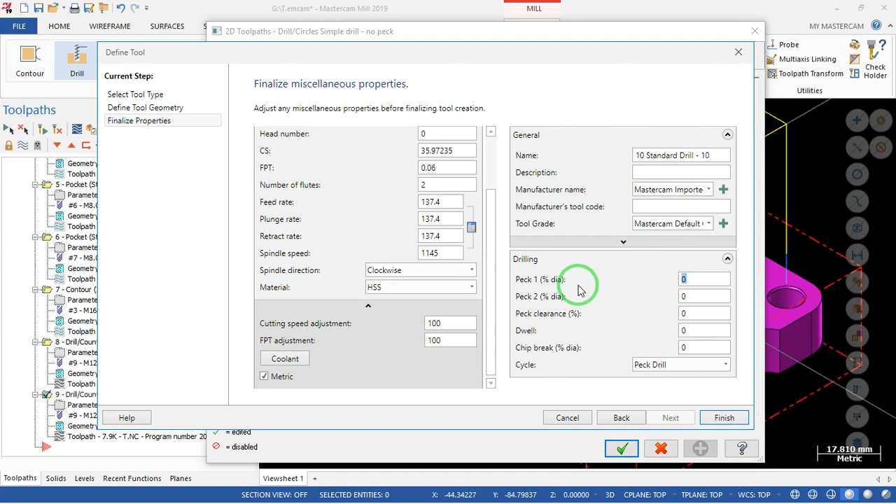Drill, diameter 10. Then next, this tool number is 12, and material is high speed steel. So calculate. Okay, so this is diameter 10, number 12, high speed steel. And now this is peck drill, so we change to peck drill, and first peck being 50%. So with that, finish. We initialize the speed and feed, and cut parameter. Okay, correct. Linking parameter, I will have to go down.

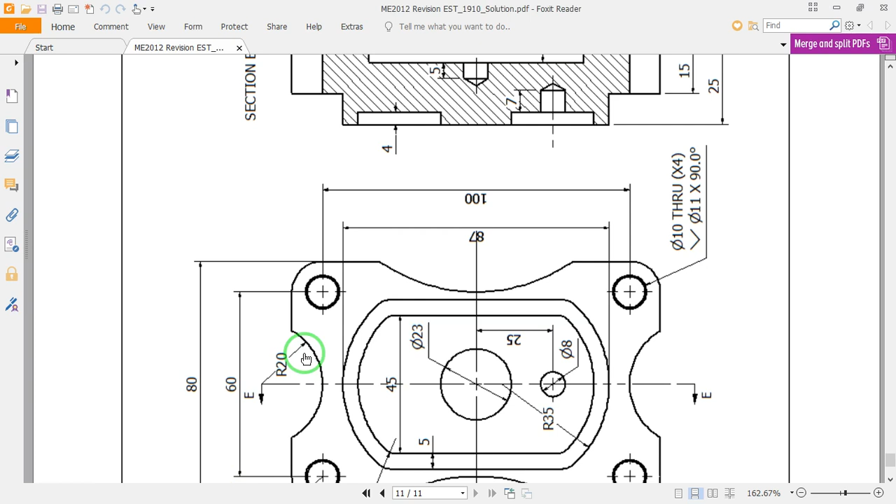So again, we'll look at the drawing. We are now cutting this hole from this surface down by how much? Well, at least it is 15, but of course we want the tool to go through. So top of the stock incremental 0 from the surface that we picked. I go down by how much? Minimum 15. However, that just means the conical part of the drill will reach 15. So that is not enough.

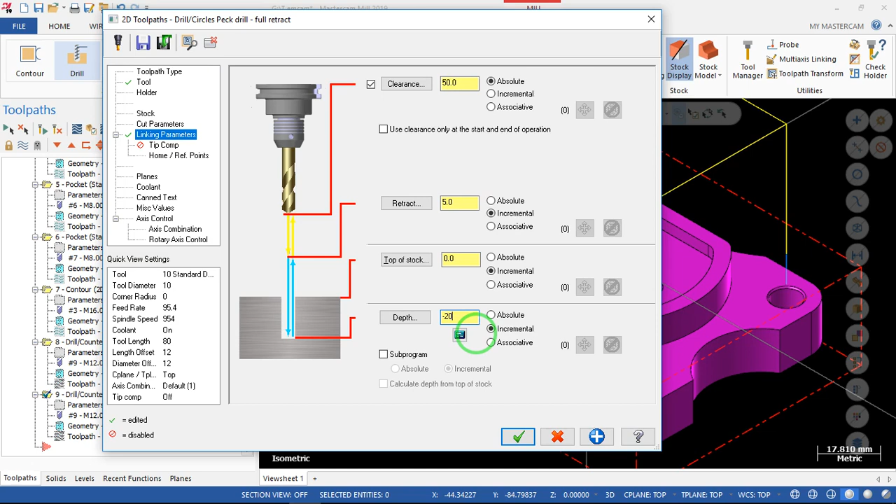This time round, I don't have to use this calculator, because as long as I make it through, I will be happy. Even if you calculate, it is about 3 point something. So we make it minus 20. That will make sure that we have allowance, and the conical part of the drill gets through the workpiece. So with that, green tick. Regenerate. So we finish the first side.

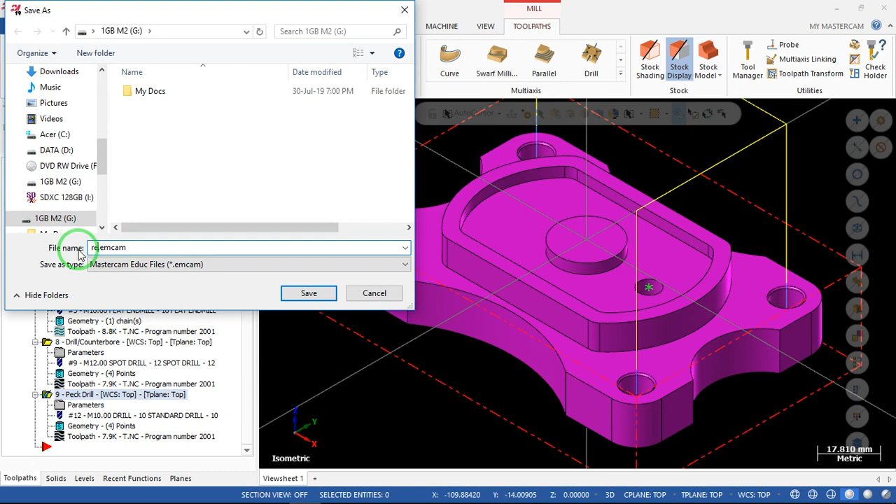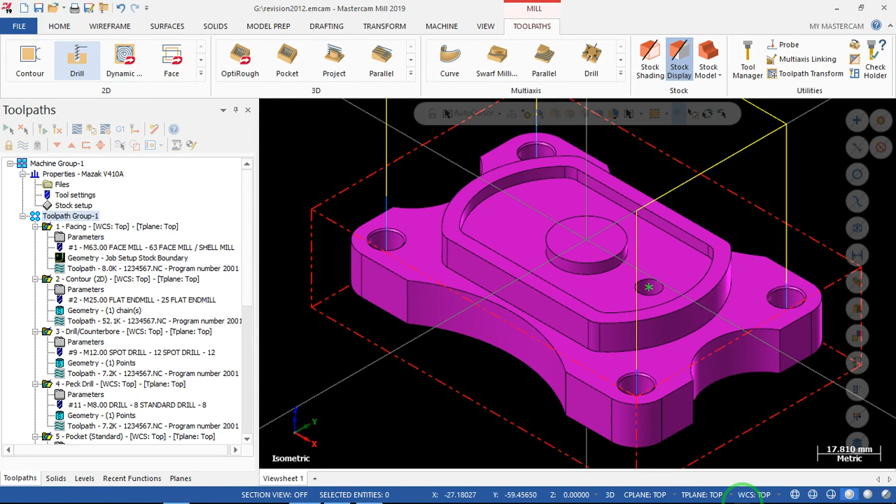Okay, so save this as, I will save it under revision 2012. And I also see that my NC file name is T.NC, so I want to change this to admission number. So select all, right click, edit the selected operations, change your NC file name to your admission number. Program number is 2001, that is correct. So with that, we save the file and we will continue in the next video.